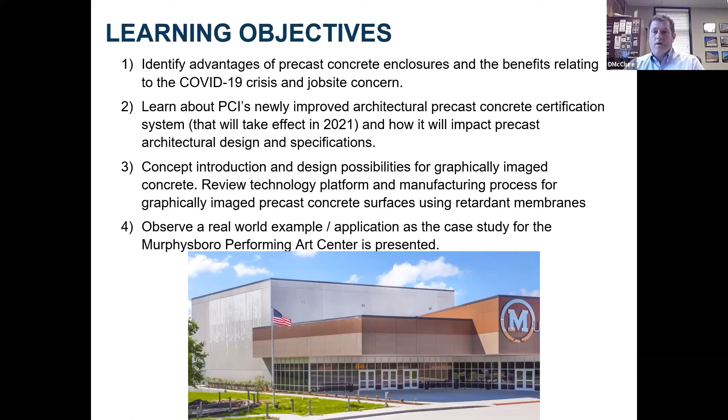What a year it has been. And that might be the understatement of the year. I sincerely hope all of you are staying healthy. I hope you're staying safe. And that goes for yourselves, your families, as well as your work families and communities that you work with.

As a result of the pandemic, we've seen a lot of new requests and a lot of new concerns about the way that job sites operate. People want to take as many precautions as they can. One large emphasis is minimizing the number of people they have on job sites, spreading out as much as possible. One inherent advantage of a precast concrete solution is that you are producing this entirely off-site. So if it's an insulated sandwich panel, you're producing 100% of your building envelope off-site. It's in a controlled environment, so these precasters are taking precautions. They're spreading out, they're sanitizing, they're taking temperatures every day. They're doing everything they can to keep their employees safe and healthy.

And where that really becomes a tangible advantage to the overall team is when those pieces start showing up at the job site, because you have fewer deliveries to the job site, and you have fewer people on the job site. A crew of about half a dozen people, a crane operator, an iron worker, and a handful of foremen can put up an entire building facade. So there's definitely some interest in that on projects that are considering which way they want to go in terms of building facade, building design, building material. Another strategy is to get on and off the job sites as quickly as possible. And with precast, you're putting about 8 to 14 panels up a day. So these do go up remarkably fast.

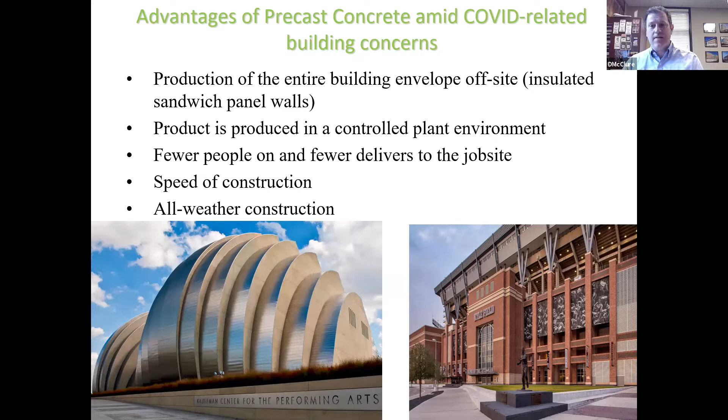And that's a real benefit, because had it been some other materials, there are a lot of other building facades that basically stop in the winter and you have to wait until things warm up a little bit. With precast, that's not the case. So that's enough about COVID.

Let's talk about aesthetics. There are 4 primary finishes for precast concrete. What you're seeing here are 2 different mix designs. The gray is one mix design, the red is another mix design, each of them split up with reveals showing the 4 different primary finishes. One is polished, which is the higher end, more expensive finish. It's a mechanical process. It leads to a smooth, shining, reflective surface similar to granite. It's very common on floors, not as common on vertical surfaces, but certainly can be done.

Then you have exposed aggregate. Now, while we don't see this as often on entire building facades, you often see it on reveals or maybe the base of your building. It's used a lot with other precast finishes. For the rough rock look, basically a chemical retarder is painted at the bottom of the bed. The panel is stripped. It is cleaned, and that retarder at the bottom of the bed keeps that surface from curing. So that surface area of concrete washes off and it exposes the rough rock.

The most common finish in the industry is a sandblast finish, and that is basically where they mar the aggregate. It generally results in a rougher finish, and there's varying degrees of sandblast, light, medium, and heavy, each yielding a slightly different appearance. And then there's acid etch finishing, which is a liquid-based application that just starts to take off the form finish, and it's a very clean, sparkling, almost a sugar cube appearance for the project.

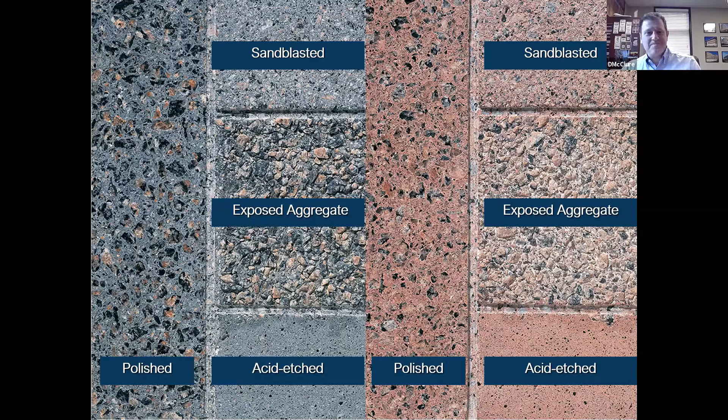So something new in the industry is the new certification system that's going to take effect next year. PCI, you could think of it as the AIA of the precast industry. It's the Precast Prestressed Concrete Institute. It is the largest, most stringent, and most widely accepted precast certification agency in the business. They've got a proven history. They've been around over 50 years. They have nationally accepted standards. To belong to this, producers agree to 2 unannounced audits per year. So they don't know when the independent inspectors are coming. They just show up and they check reinforcing, curing strength, quality, safety, finish capabilities.

So producers really have to maintain a lot of standards to be able to meet these quality control requirements. So it really makes the industry better. Having a pre-qualified bidder gives you a higher probability of success on your projects. You know your producer's going to be able to meet a certain level of finish expectation, and ultimately it's going to save time and money because there's less probability of something going wrong with a pre-qualified bidder.

So the question might be, why change? Why the new standards? This is really all about PCI raising the bar. There is a standard that did not exist before that some producers are going to qualify for, the top tier standards. There have been some technology advancements that have allowed for these. The industry has been calling for tighter joints, like 1/8 of an inch joints, for a long time. We're finally at a place where we can do that. So it gives you more options. It allows you to align producers based on their specific capabilities, to identify producers with advanced complexity.

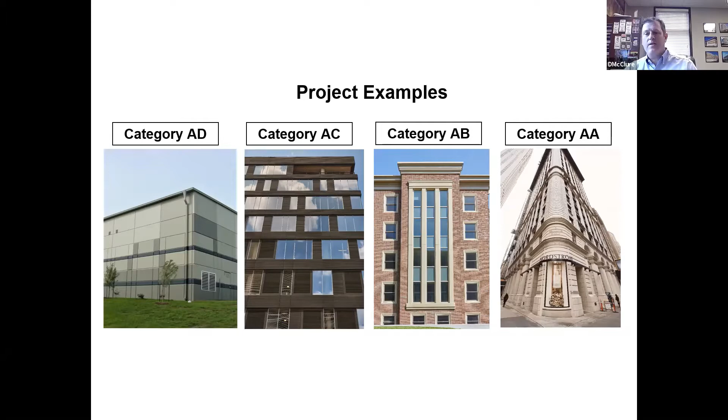Then you've got category AB, where you can see the bump outs, the changes in transition, the cornices, the additional complexity. And then you get to AA, those tolerances tighten up. And those are the really ornate projects. So to understand it a little better, it's good to see what each producer that is aspiring for each category is going to have to be able to produce.

For AD, for an exposed precast panel, they need to be able to do a flat panel with reveals. For AC, they need to be able to do the same thing, a flat panel with reveals, but the reveals are a little more complicated and they need to be able to turn that corner. With AB, you've got to be able to do 2 mix designs within the same panel. You need to be able to do at least 2 finishes within the same panel. You have to be able to do curved panels. You start to introduce bull noses and projections. And then with AA, it is similar to all of those things, but they introduce an increased level of detail.

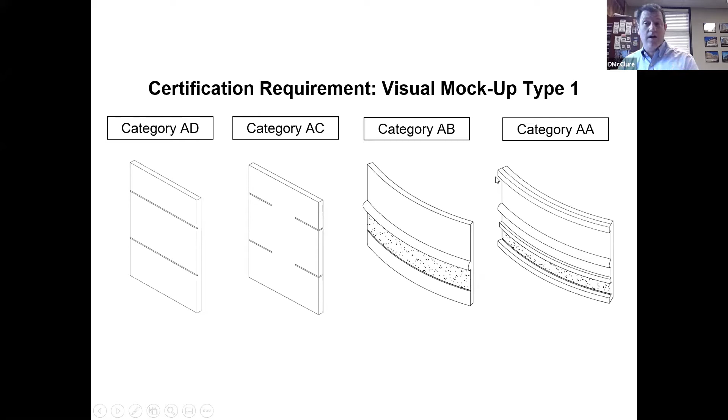So another mock-up, similar concept for a thin brick project. AD producers just need to be able to do a flat panel. AC producers need to be able to turn the corner with those panels. AB producers need to be able to produce an L or a U-shaped piece. They need to be able to create a transition between the brick and the other exposed precast finish and make that transition successfully. And then with AA, you see they start to have more projections, more cornices, more detail.

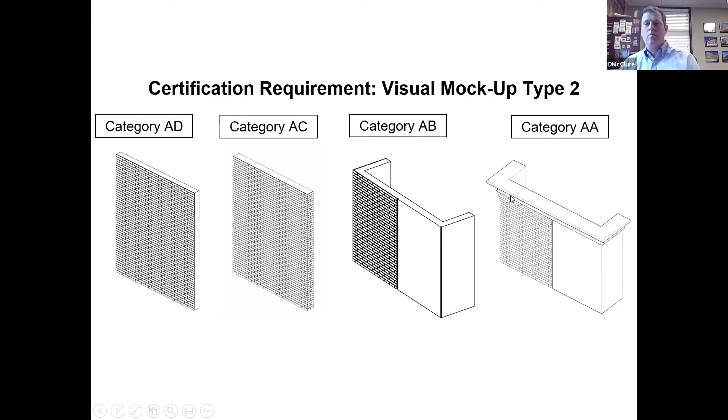And not every producer is going to be AA. There are some producers that are going to say, you know what, we're a structural producer, we're going to stick in our lane and we're going to do AD and AC jobs because that's what we're good at. And the other producers are going to aspire for these other categories, and that's helpful because for a certain caliber of job and complexity, you want to have a certain caliber of producer, and that's one of the benefits of what this provides.

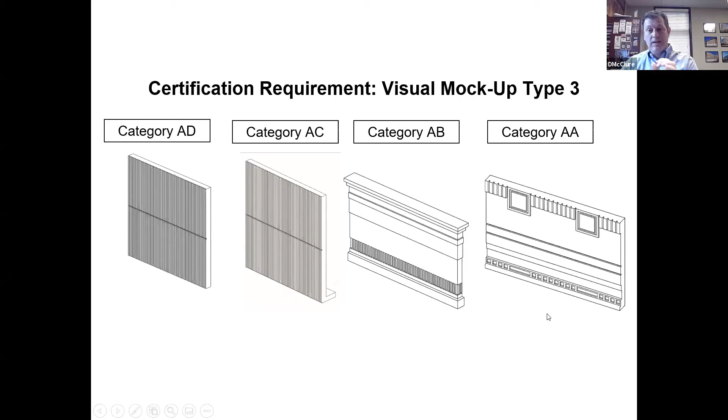So with AD, again, with a form liner, same thing, flat panels. With AC, flat panels with a return, and with AB and AA, you can see the additional levels of ornate complexity. And then with AT, that category remains fairly similar, but they have introduced a mock-up process where they need to be able to show that they can do curves in certain levels of complexity for a small projects division.

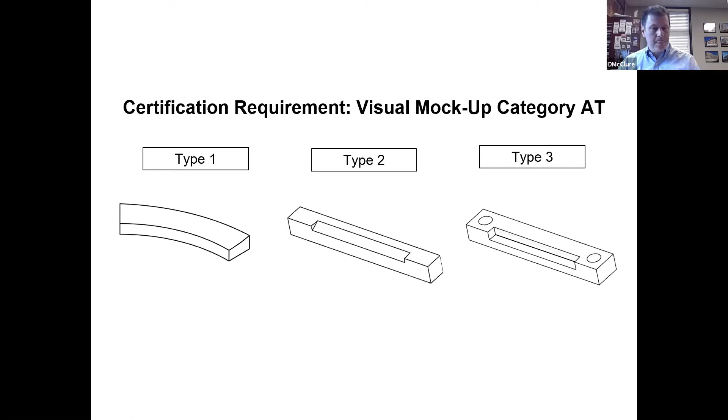So let's see what this looks like with some job examples. And as you're looking at these, hopefully you can start to think about where your job might fit into this. With the trim category, you have single color components, single pour returns. You can do radiuses. While there's no site survey, they do need to match 117, which is the old A1 architectural standards. So here's an example of an AT project, this medallion for Creighton Preparatory School. This was a little one-off medallion done for a private school, and you can see the amount of detail that you can get into with a 3D form liner.

Another AT project, and this was actually done with graphic concrete. Lena's going to unpack that in detail in a moment. A really great thing about this project was for this private Catholic school, the art teacher actually designed this cross medallion. So you had an unprecedented amount of owner involvement. And one little plug I'll put in for graphic concrete, I know we see in some cities and municipalities there's a requirement for 1% art, permanent art. That fits perfectly in with graphic concrete if you commission an artist or a local liaison to do that design. So that's AT.

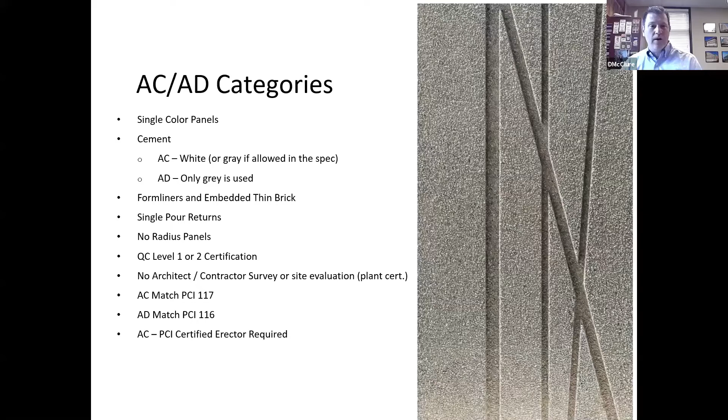A1 standard. So you can do a pretty nice AC job. This school in Grand Island had 2 colors of thin brick. It has this overhang that flares out. That's actually 2 different finishes on the same panel. So you've got a combination of acid etch and exposed aggregate in the same panel. We talked about that a little bit before.

For this project in DC West, there is a combination of thin brick and exposed precast, and they spread out the brick in a way that it has kind of this speckled appearance. The design concept was that it was supposed to emulate crashing waves on a beach, a pretty cool little design in this project in Nebraska.

Stepping up to AA and AB categories, these are categories of quality that did not exist before. Here you're using multiple colors within a single panel. You can use white or gray, but most of these projects are going to use white. In addition to brick, you can do embedded stone, tile, terracotta. We're going to show an AB example later that used graphic concrete. You can do cold joints and returns, 3D formed surfaces, so you can do L-shaped pieces. The quality control level steps up to level 3.

And here's a couple of layers of accountability that didn't exist before. With AB, you're going to have a project survey with the architect and the contractor. And then for AA, you're actually going to have a PCI site visit audit on the project. So they'll not only audit the project in the plant, but they'll audit it on site. For those projects that just have to have a lot of detail and have to be absolutely perfect. So AB has tolerances similar to the previous A1, 117. AA has tolerances that are actually tighter than what existed before.

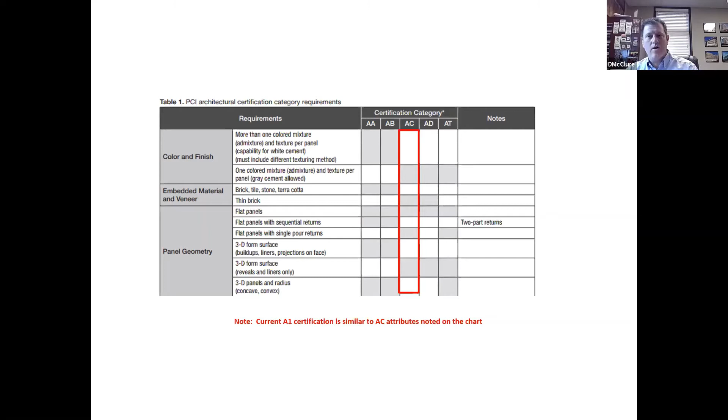And I'm on my time here, so I'm going to hand it over to Lena in just a moment. You're probably thinking, wow, that's a lot of information. How can I digest that? I'll show this website again at the end of the hour, but I'd encourage you to take a note of it. If you go to pci.org, architectural certification, it'll give you more information on that program, and you can see where your projects might fit, whether it's an AA, AB, AC, or AD project.

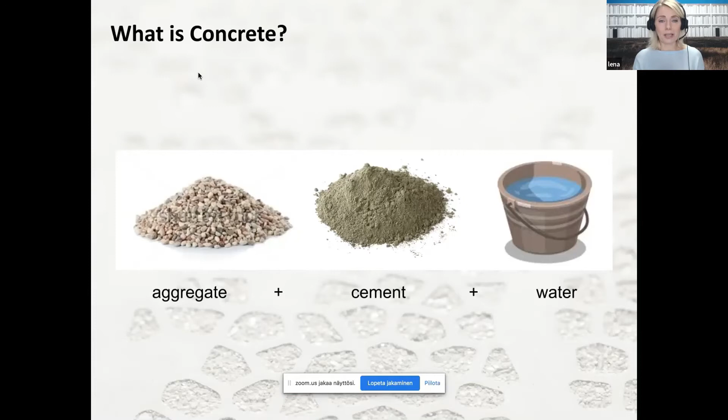Then, as Dirk said, if you take away this little layer of cement from the surface, you would expose the aggregates, and then you have the exposed aggregate finish. The graphically imaged concrete, or graphic concrete, is a combination of these two. So it's partly smooth and partly exposed. I'm going to explain how this is happening.

But first, it's good to remember that this is a technology for the precast industry. It can allow you to transfer anything you can print on a printer to your concrete surface. But it's important that it's precast. It's not working for on-site casting, as you can see when I'm explaining this technology.

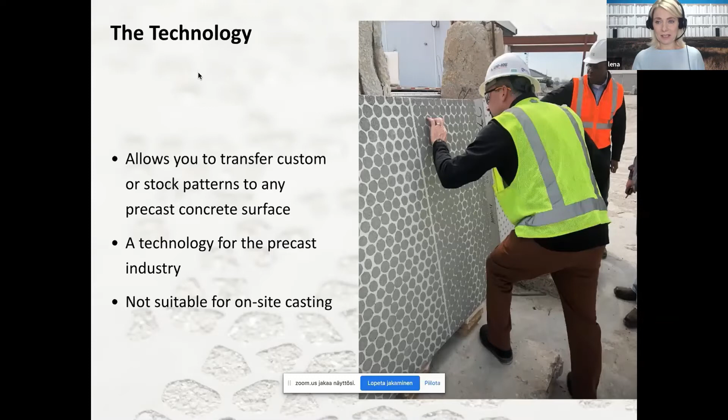Here is how it works. The designer, maybe you are like, oh, okay, I'm gonna design a school. So what would be nice to put on the facade of a school? Well, I gotta put in some texts and something about learning, and you design a pattern, whatever you would like to see on your facade.

This pattern would then be printed on this big roll of, we call it a membrane. It's like a special paper. We would print the pattern on that membrane in Finland. And then this membrane would be shipped to the local precaster in the United States, who would actually make the panels. So paper or membrane made in Finland, panels made locally. It would be stupid to ship the stones. So it's very important that it's local production.

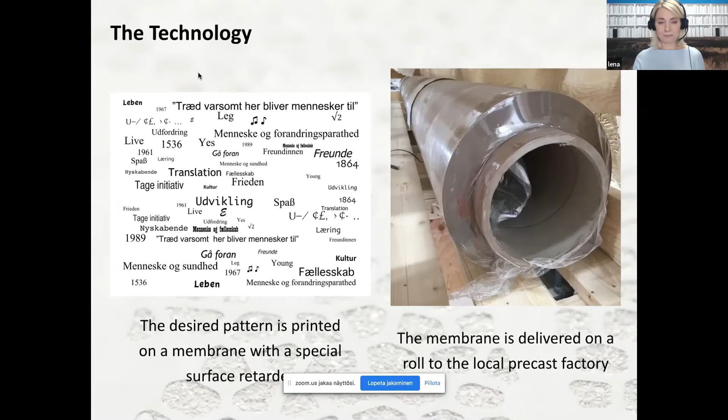So the membrane arrives at the factory. They would cut out the piece that is needed for the panel, lay it down in the form, and cast concrete on top of this membrane. This print you can see here, it's a surface retarder. So that print would hinder the cement on the surface from hardening. Even though the panel is cured, those parts that have been touching this ink would still be soft.

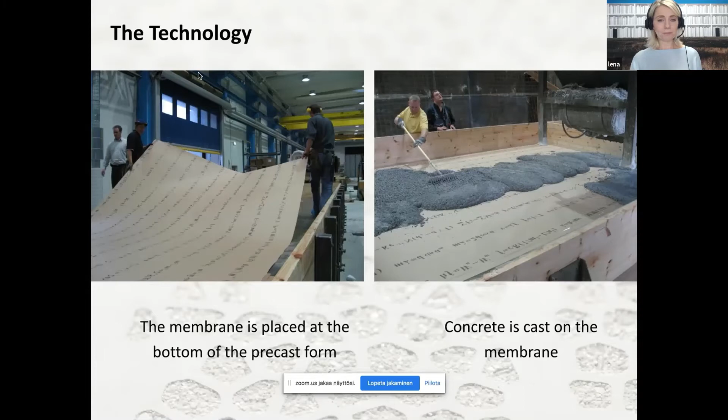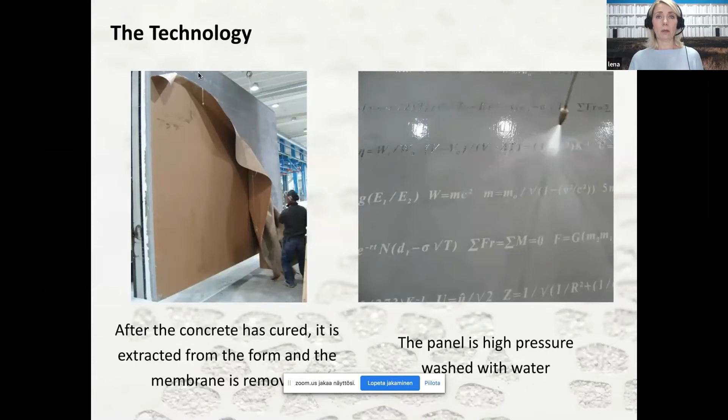So the concrete has cured, it's extracted from the form, and here you can see they remove the membrane, and you can see where the text is kind of white in the photograph, that's where the surface is still soft. So then at the factory, they just go over it with a pressure washer, just pure water, and you wash away the surface cement only where this special ink has been. And that way you reveal the pattern, you have your graphically imaged concrete ready, and the panel is ready for installation as such. And there you have your beautiful graphic concrete school.

The membrane itself is very large. The width of the print is 10.5 foot. And then it's as long as what you would need for your project. This membrane is disposable. It's used once. So at the factory, they take the piece they need, they lay it down in the form, and then they dispose of this membrane.

So it's super flexible. You can have different sized panels, different forms. You can have small pavers. Then you just cut up the membrane to the pieces you need. If you have a really, really big panel, these membranes can be joined. So there's actually no limit to the size of the panel you can do with these membranes.

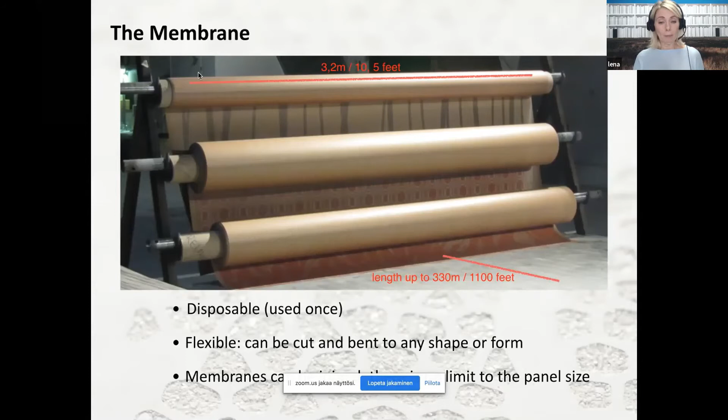The good thing is that this is totally environmentally friendly. It's recyclable. After use, you have to take away the cement residues, but otherwise you can burn it, you can recycle it. It's basically paper. It's very good for the working conditions in the factory because it doesn't emit any harmful substances or gases, dust, nothing.

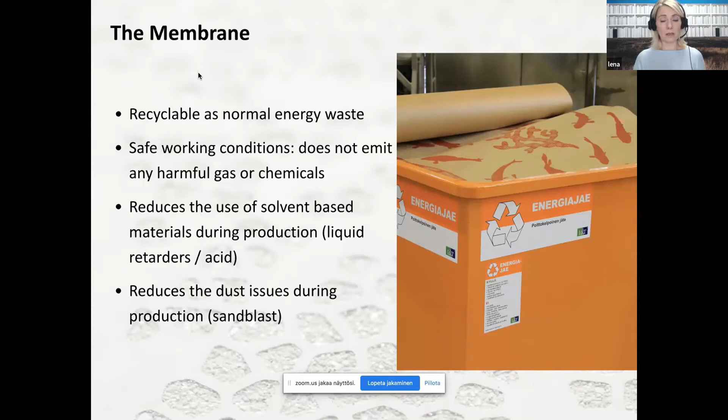If you compare with liquid retarder, you can have the solvent-based retarders, or you can do maybe a pattern with sandblasting and a stencil, but with the sandblasting, you could have the dust inconvenience. So when using this membrane, you can have very good working conditions at the factory. So I think that's also an important aspect of this technology.

The production itself at the factory doesn't really require any special equipment. If the factory can make exposed aggregate surface, they can also make the graphic concrete surface. It can be used with very different mix designs, very different types of concrete. It can be the heavy traditional concrete. It could be the concrete you need to compact, or the self-compacting concrete.

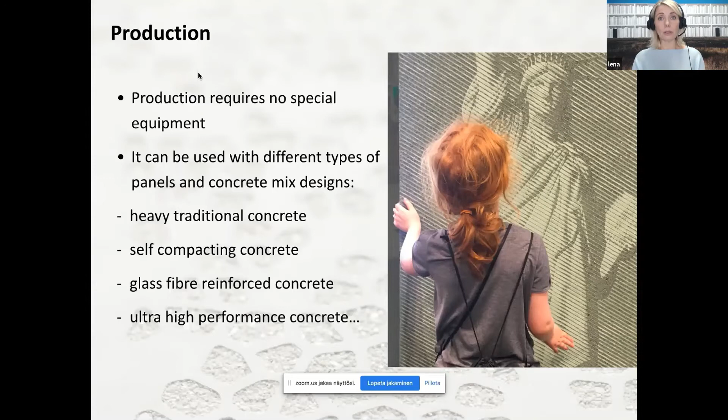If you want to make an interior design, you can use it for glass fiber reinforced thin concrete boards, or if you want to make a flooring, you need ultra high performance concrete, super hard concrete. You can use it with that also. Important to remember, it needs to be precast and horizontally precast on a table. As for the structural aspects, this exposure is very fine because you're only washing away the very surface of the panel.

So you don't need to think about any structural changes when you're using this method. If you use a form liner, you need to have more concrete because you have those curved forms, so you need to add some concrete in order to carve some away. But with this technology, you use as little concrete as possible, and the panels always stay very slim and light, and that's of course very positive when it comes to transportation and installation.

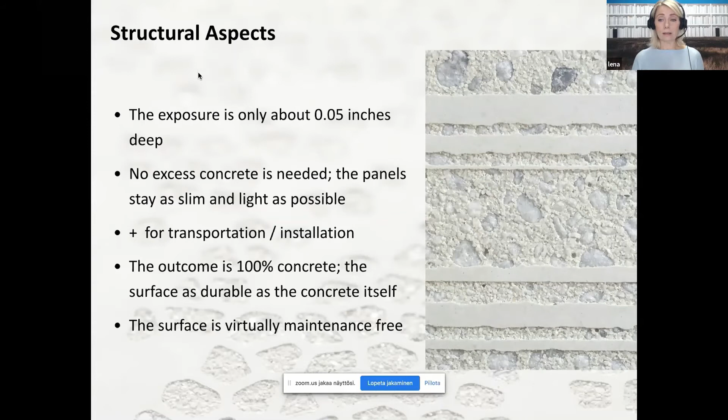Another very nice thing is that since this is 100% concrete, it's very durable. It's virtually maintenance free, and since this is a flat surface, it's not going to attract any dust. The rain will wash off the dirt, and if you need to clean it, you can just power wash it. It's as durable as the concrete itself.

Then the design possibilities. As I said, whatever you would like, you could have on your concrete. And then you can vary the looks by choosing different aggregate colors, or you can have different colored cements. You can have gray cement, white cement, or you can add pigments to the cement. Of course, you cannot color the stones, but with pigments, you could color the smooth, fair-faced surfaces of your design.

Then, of course, you can also paint this or stain this. We have an interior project where they painted it all in gold, still having this structure. Of course, you could do that, but then you lose the maintenance-free aspect. So, if you paint, of course, you need to repaint after some years.

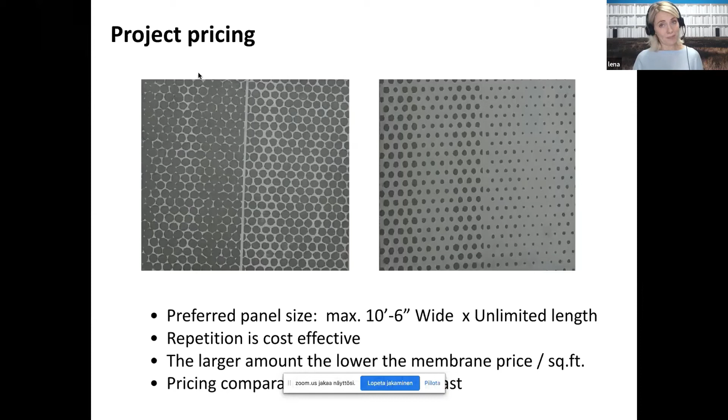So I think this was my last slide now. Yes, now I think Dirk is going to take over again and tell us a little bit about an example that you made with graphic concrete. Yeah. Thanks, Lena. Thanks. It is not advancing. Let me try this again here. Screen. There we go. All right.

The example is the Murphysboro project in Illinois that we showed earlier. Now, and we talked about these categories earlier, this would actually be an AB category. This is a building that didn't have a lot of right angles. So from an architectural and a constructability perspective, it had some challenges going on. It was at the time not the first, but the largest and most notable graphic concrete project in the United States.

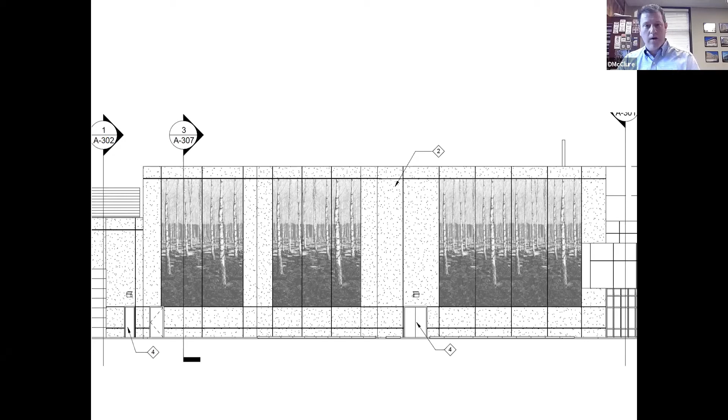Here you can see how it started on the drawing board. They had this birch tree pattern that they wanted to use. The next step, they got a precaster on board, and they went to mock-up. The nice thing about mock-ups is you can start to see that pattern take form, and then you can give some feedback in terms of what you want to do with your reveals, the depth of your reveals, the number of your reveals, the placement, that sort of thing. Then this was the first panel that we poured out in the yard, cleaned it, and just waiting to go out to the job site there.

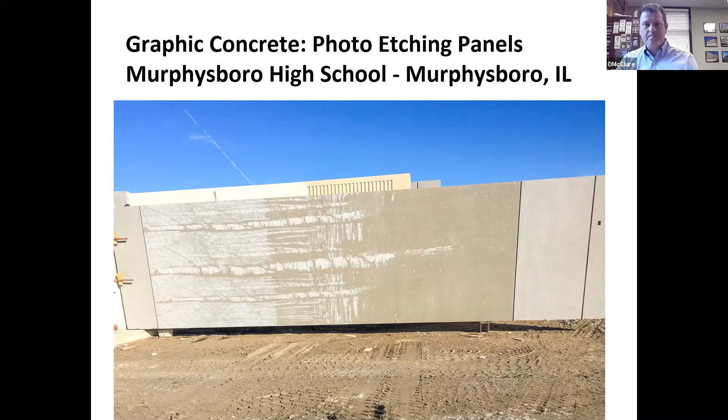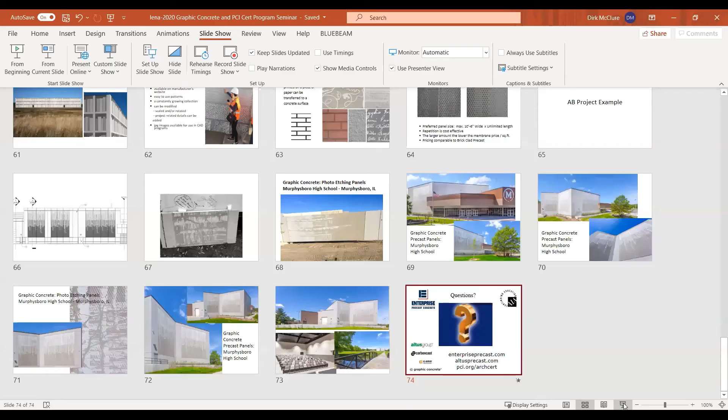Okay, and then this question is also for Lena. Are there any cost differences for heavier patterns? Patterns having more of the retardant ink versus more blank paper area? Oh, that's a good question. The pricing of the membrane, it doesn't matter if it's a dot or a stripe or a dog. How much of the ink is used does not matter. It's more about, as I said, the size of your image and how many times it's repeated. That's mostly what matters. And then it's good to remember that when we talk about price, it's only the membrane.

That's like you buy a jar of paint, but after that you need a wall and you need somebody to paint the wall. So it's really important that your local precaster would give you the final price for the final panel with the pattern on it. So the pricing is something that we would do with the precaster. They would ask us, how much would this design cost? Of course, we can help the designers and indicate whether you want to go expensive or do something cost effective. But the final price always comes from the precaster, because it depends on so many things: how big is the panel, how thick it is, is it a sandwich panel. So that's good to remember.

Yeah, and I might just add, if you're doing a project like Murphysboro that had a lot of repetition, you get past the setup, and those are the kind of projects where you're very easily going to get within striking distance of the cost of a thin brick project, probably just $1 or $2 per square foot. If it's just one facade and you're doing a person's face and it's just one thing in one place, there's some setup fee, and that one's going to get a little more expensive. But just like with anything with precast, with form liners or anything else, repetition is where you really hit your stride in terms of efficiency.